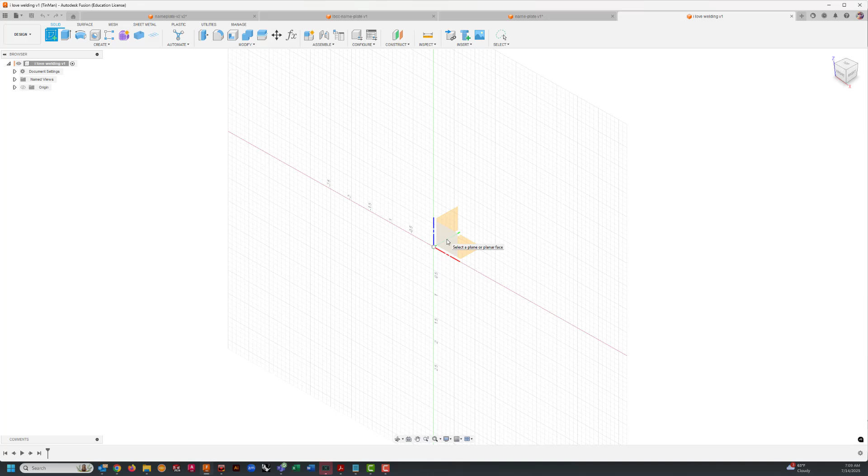Click Save. The next step is to create a sketch, which is this button here. And we're going to create a sketch on this front plane, which is the blue and red plane. We're going to make a rectangle. So we click 2-point rectangle or R on your keyboard. Click on the origin and drag up and to the right.

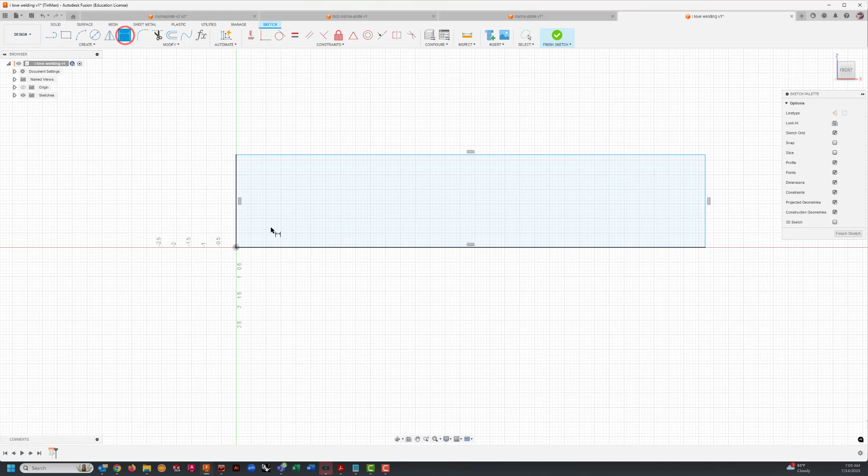Click again. Click D on your keyboard or the dimension button and dimension this 20 inches and 2 inches. So we've made a rectangle that's 20 inches wide, 2 inches tall.

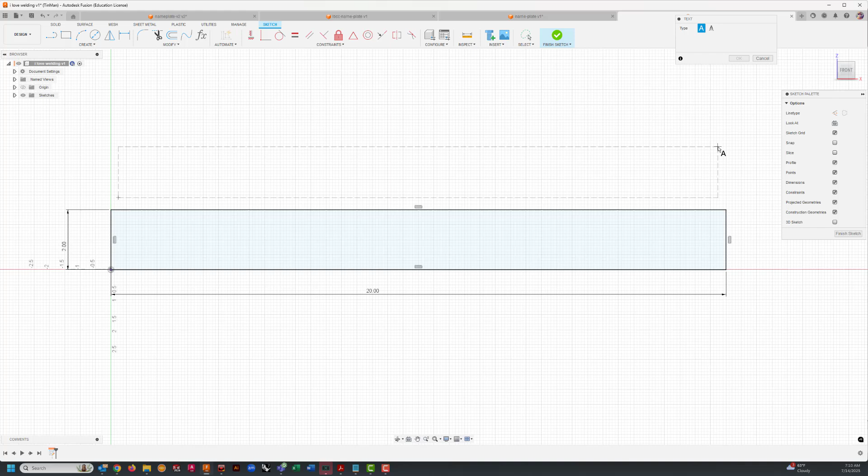Now we're going to go to create text. And this doesn't matter exactly where, but we're going to click somewhere above our rectangle. And we're going to drag over a rectangle. It's about the same size. Click again. And now we have some sample text in here. We're going to type in all uppercase, I LOVE WELDING.

And you can play around with the font. So you can go skinny. Bold. I like rounded. You can also change the height, which will also change the width. When you're happy with the text, you click OK. And then you place it so that it overlaps.

It must overlap. If you look right here and zoom in, you'll see the bottom of the text is overlapping the rectangle. If you don't do that, it won't join together. So now that our text is overlapping the rectangle, we're going to right click on the text and click Explode Text. So that created an outline. Now we're done with our sketch.

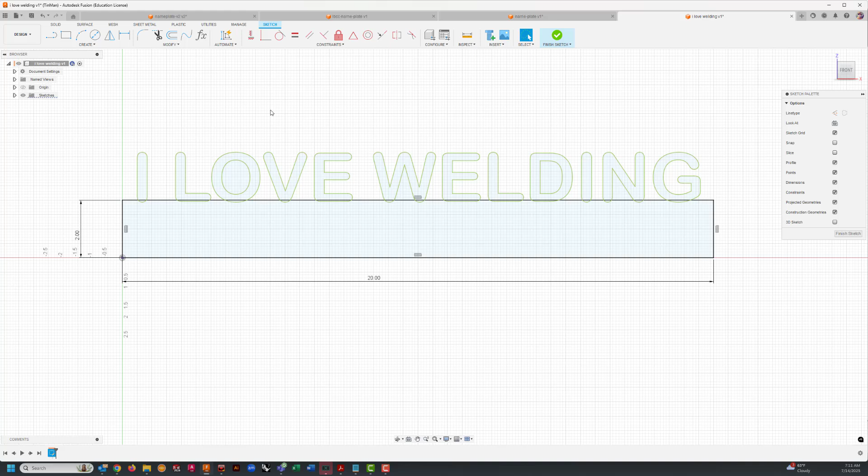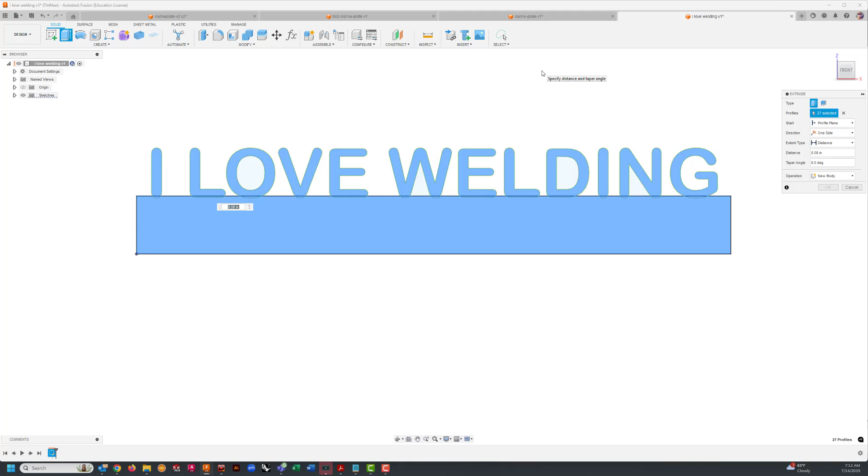So we finish sketch. We're going to extrude and we're going to click everything. We have to unclick anything that's hollow. And it looks like I missed these two little parts right here. So everything that's blue will be filled in with metal. When we are happy, we're going to extrude it 0.06 inches. And just like that, we have a solid.

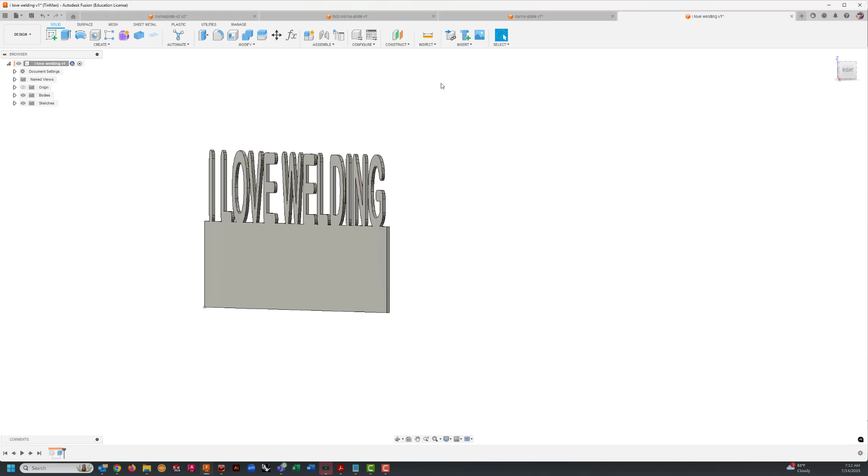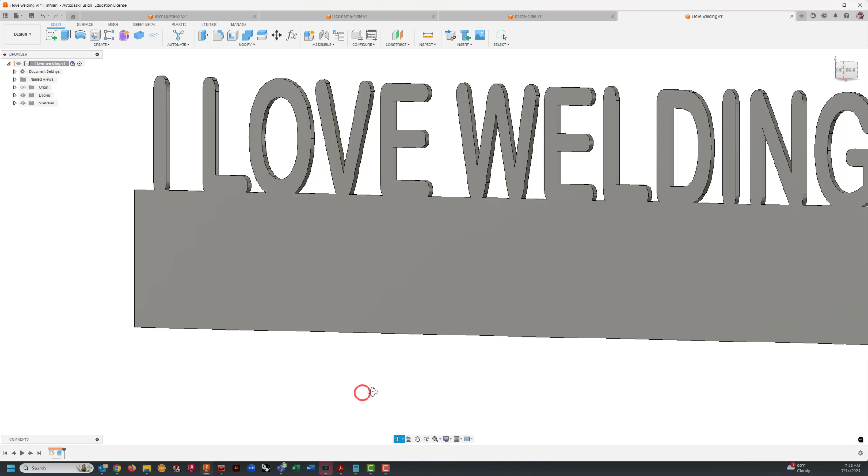You know it's a solid because if you rotate it, which you can do by holding Shift and clicking the center mouse wheel, you can orbit. You can also click the orbit button right here, and then just use your left mouse button. Constrain your orbits.

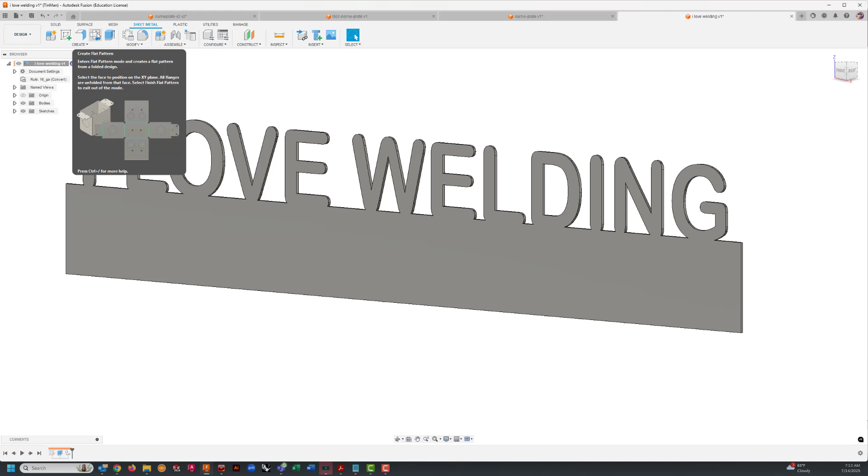Now that we have a solid, we're going to go into sheet metal and we're going to convert it to sheet metal. It will automatically decide that it's 0.06 inches. Within sheet metal, we want to create a flat pattern. So this button right here. Click stationary face, OK.

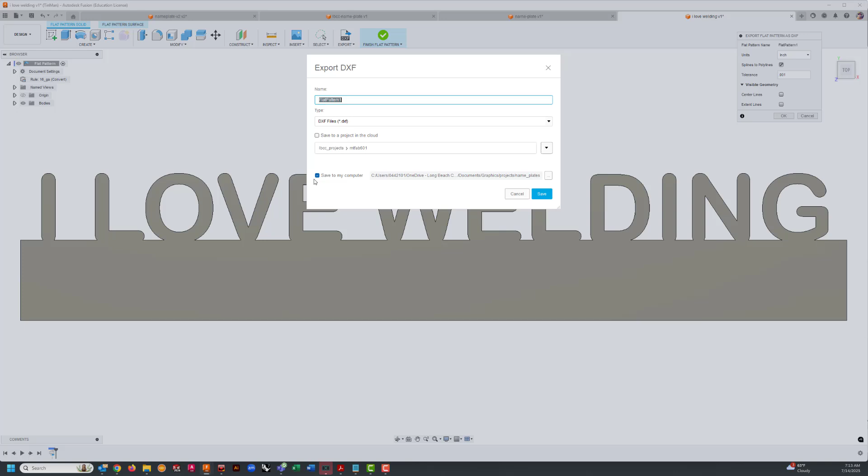From this point, you want to export. And you want to convert your splines to polylines. And you want tolerance to be 0.001 inches, or 1/1000th of 1 inch. Click OK. It's going to ask, where do you want to save it? You want to save it to your computer. You should put it in your downloads.

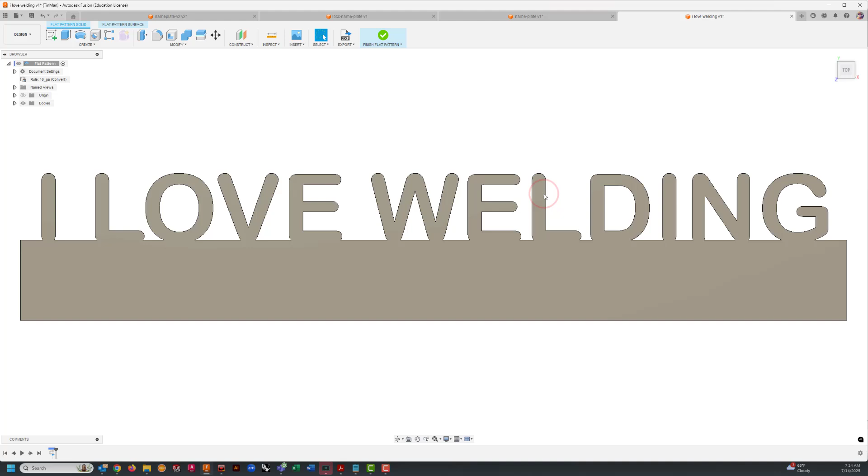It will name it flat pattern. This is where you want to click and type your name or the name of your part. Save. At that point, you want to finish your flat pattern, close Fusion, and then submit the assignment into Canvas.